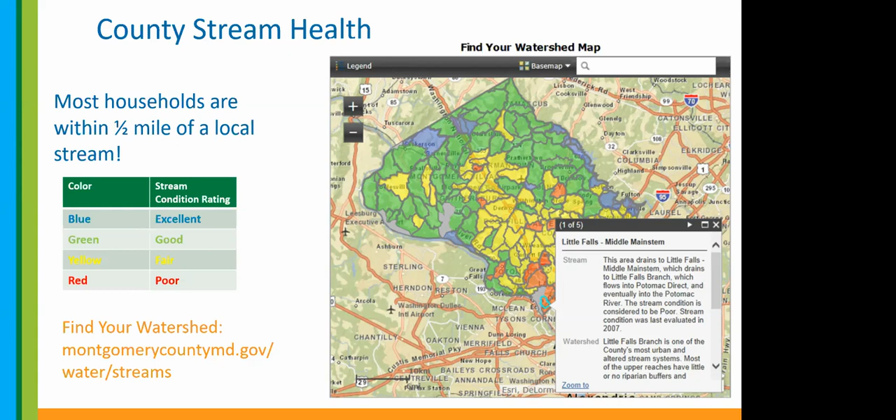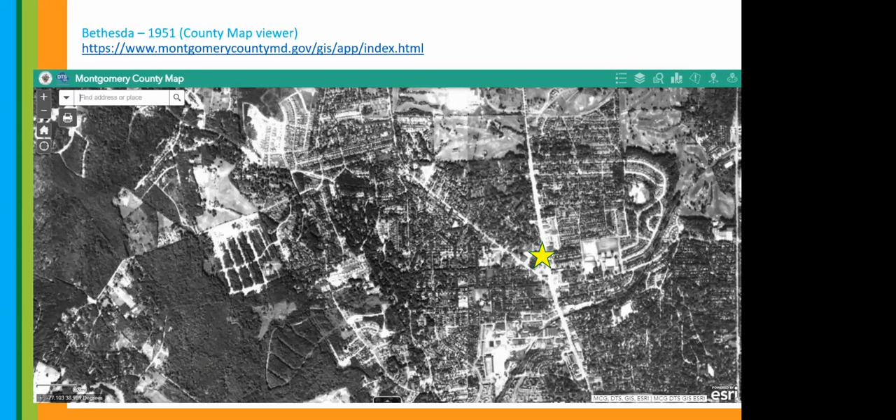So this is 1951, and this is off of the county map viewer. So when you look now again, here's Bethesda today from the county map viewer, and you can see the big difference we've had, especially on the left side when it comes to development and expansion in the Bethesda area. Star's in the same spot, Old Georgetown and 355. So you can see how much we've expanded in 50, 70 years.

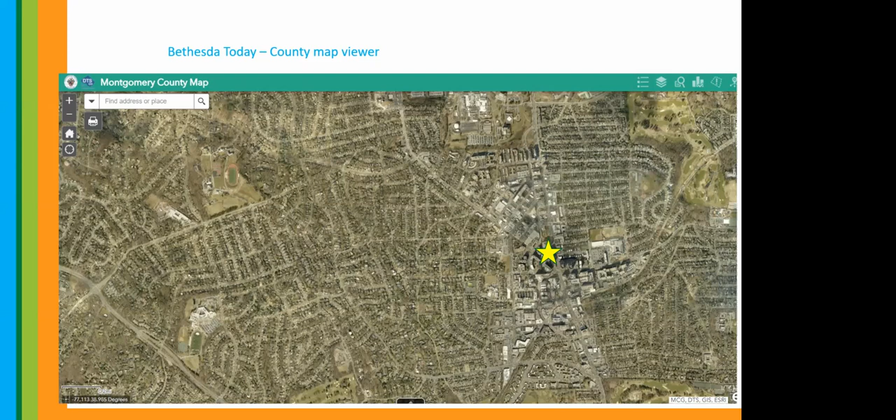What happens is those areas that used to have wetlands or be connected to the floodplains - the water was able to expand out and not create as much of a flooding situation, it was able to absorb it. Now when we pipe it, we don't have the ability to slow it down before it gets to our streams. So, runoff - everyone knows what runoff is.

Water does not soak into the ground. It hits these harder surfaces like rooftops, driveways, and parking lots, and it collects contaminants that flow directly into our streams, into our storm drain pipes, and eventually leads to our streams.

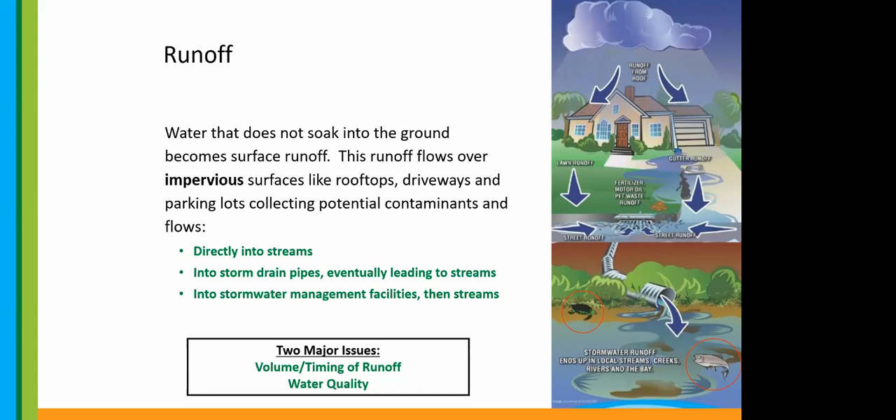To explain this a little further, to compare the difference between a natural environment and the urban environment - this is an example from the Philadelphia Water Department, which I really like. In a natural environment we don't have buildings, there's no hard surfaces, you have natural spongy soil, and it's able to have about 25% infiltration in the first layer of the soil, with deeper penetration into the subsoil areas.

So when it rains, that much is absorbed back into the ground, and you also have evaporation of about 40%, which leaves 10% as just surface runoff that comes off of the land.

But when you build on it, we have all these buildings, and those are all surfaces that are not able to absorb water, and we have very little infiltration into the ground because it's either paved over or there's a building there. Since the soils are so compact, there's very little infiltration into the soil.

So what happens is we have about 55% that ends up running off, which is a huge increase in volume, and that's what we end up seeing with a lot of the flooding that we get today.

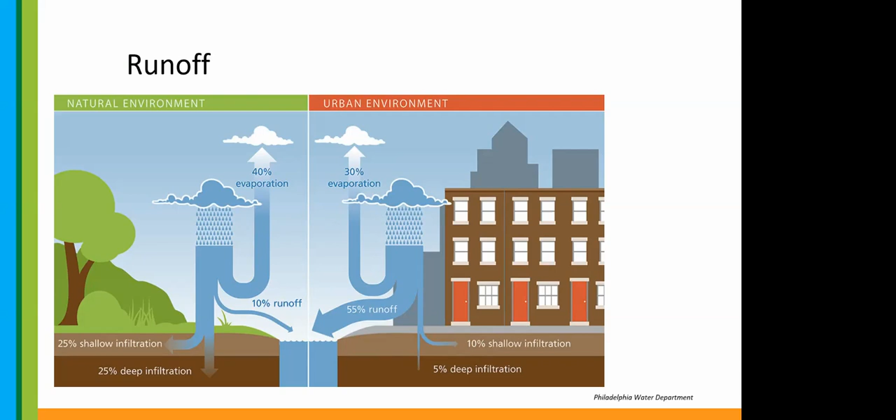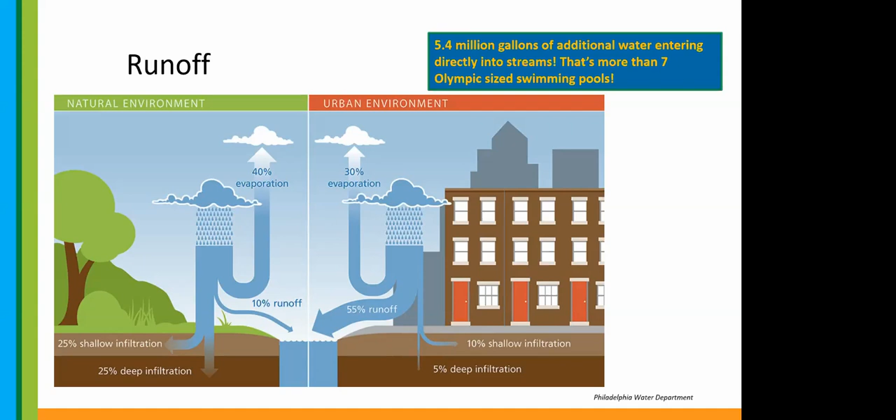I could say, as an equivalent comparison, it's about 5.4 million gallons of additional water entering into our streams - about more than 7 Olympic-sized swimming pools.

Big difference. To illustrate this again, these are two examples, also in the Pennsylvania area I believe. You can see the green - this example is urban Mercer Creek.

So when it rains, right from the very first hour, we have a huge spike in the volume of water. There's higher stream flow increase, higher peak flow. This happens when we have flash floods and a lot of increased erosion, because it's basically a wall of water hitting our streams in those areas, and then it goes down really quickly too.

But if you have a forested area, there's much more ability for the water to absorb into the ground. You can see the blue line here where there's not as much of a spike in the volume of water coming through - and this is measured in cubic feet per second, so that's a lot of water rushing through these creeks at that time.

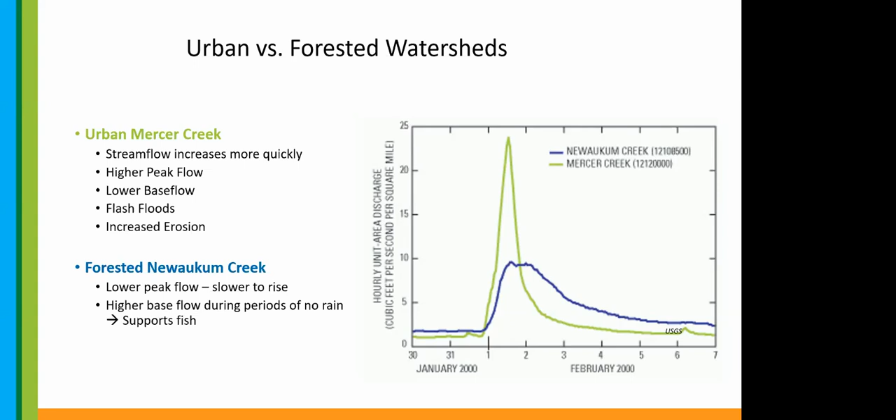So that's just an example of the amount of water coming through some of these areas that are heavily built compared to a forested area.

And then, of course, with it, it takes all of these contaminants, trash, higher temperatures, water that's coming off of surfaces like the parking lots, the temperature is higher. Oil spills, pet waste, all those things can end up washing down and into our streams. Again, trash. So those are all connected to our storm drain system, and all the storm drains connect to our streams. So basically, if it's left on the ground, it goes through our storm drain system and into our creeks. And again, those end up clogging some of our streams too, and our streets.

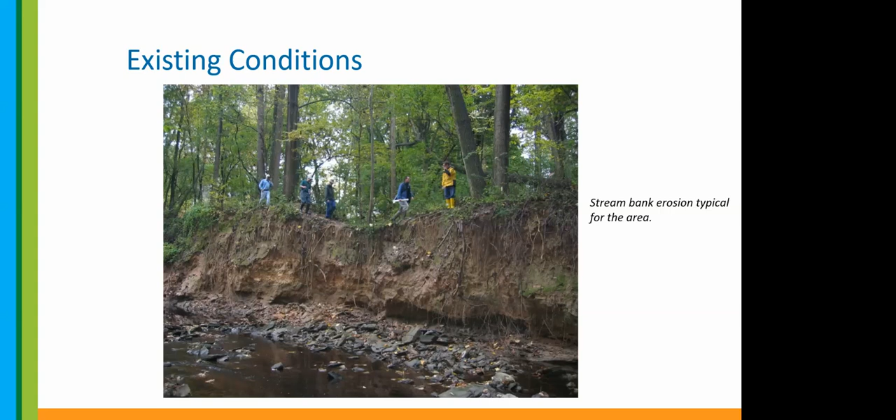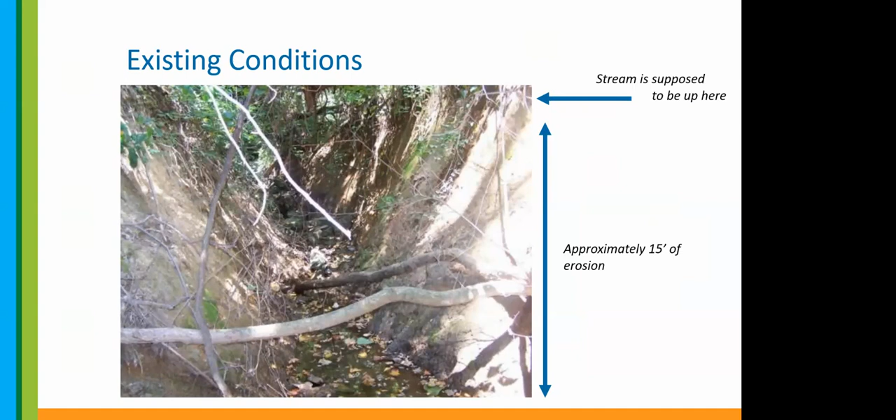Here's another one, same example. Basically, the stream is supposed to be up there. That's 15 feet of erosion over time. So in forested areas, there is a natural ability for erosion, a natural process of erosion. It happens. But we certainly accelerate that by the type of building and development that we do in our areas.

And some of them are actually built up completely, taken in that entire area. And you can see the difference between this home and the one next to it. So the more these houses increase, the more impervious surfaces are, the larger the roof size. This one has a driveway now, things like that.

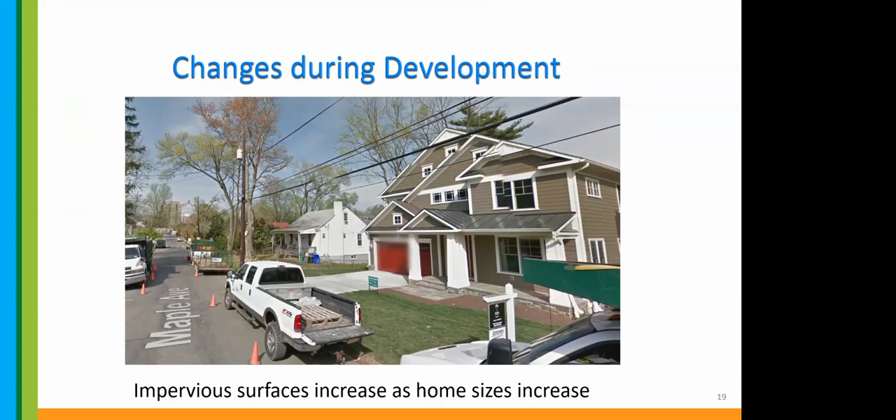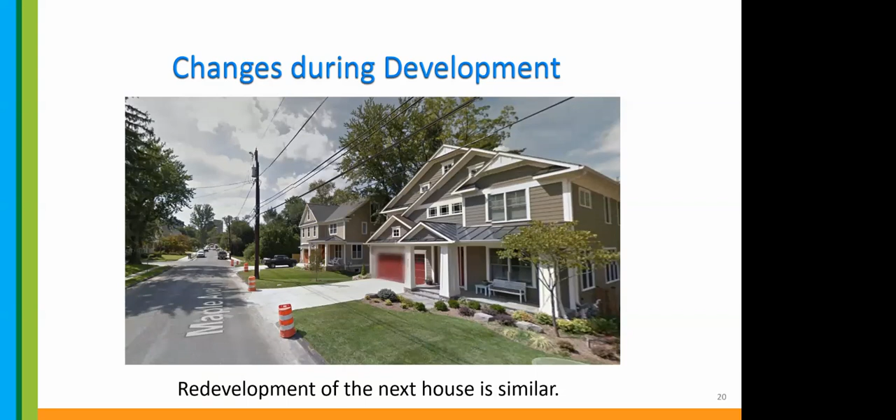Now, some of these have been done before the Stormwater Act of 2007, but I'll show you a couple examples of how this has gone in this area. And then next door neighbor did the same thing. So there's nothing wrong with these homes, but you'll see as I get further along what happens in that situation.

So to show a little bit of a comparison, financially, we had to think about what effect this was having, like on our tree canopy. So trees are very important for the protection of stormwater as well. They absorb rain, first flush rainfall, things like that. So they're important to have, and the roots keep the structure, keep the soil in place when we're doing these, when we have these projects.

So for the first home, it sold for $615,000. And then once the new house was built, it was almost $1 million more. So you can see a big difference in the costs for these. So the area is being built and being, I guess you could say, improved, but it depends on your eye of the beholder, I guess. Beauty's in the eye of the beholder. But so there's just a big difference in what might have been a smaller, more community-feel kind of place, and now some of the larger homes.

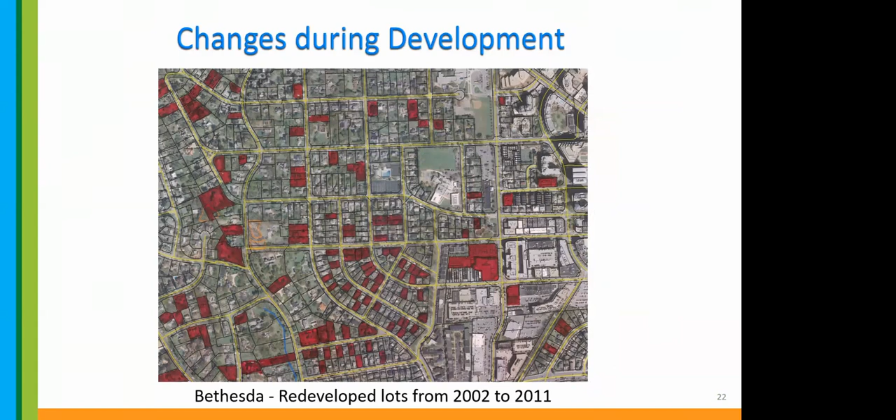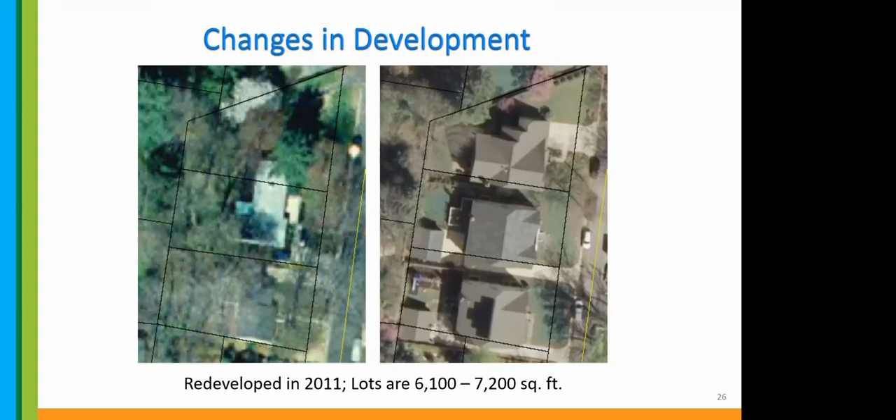Here's another example of areas where the trees were completely taken out. These three on the left show the little rectangles, the shapes. This was 2 homes that took up 3 building lots. So you had two homes there, and with redevelopment we got 3 much larger homes. They basically cleared out all the trees in that area and put in this little postage stamp, leaving no area for anything to absorb water, and no trees.

So what's the big deal about all this stuff? Really, it's damage to property and our infrastructure. I'm sure many folks on this call have seen this.

Just to show a little comparison, we have 1,500 miles of streams in Montgomery County, but 11,000 miles of stormwater pipe, storm drain pipe, and 900 major outfalls, covering about 500 square miles of Montgomery County. To give that some perspective, this 13,000 miles is about the perimeter of the United States. That's a lot of miles, a lot of pipe, a lot of water.

You can see in the picture on the left, the stream used to be up at that level at the bottom of that outfall - there's a little outfall pipe there. We also have pipes on the right side; that's a sewage pipe, a WSSC sewage pipe, and this erosion affects our infrastructure. So it's really important to be thinking about these things as we're doing development.

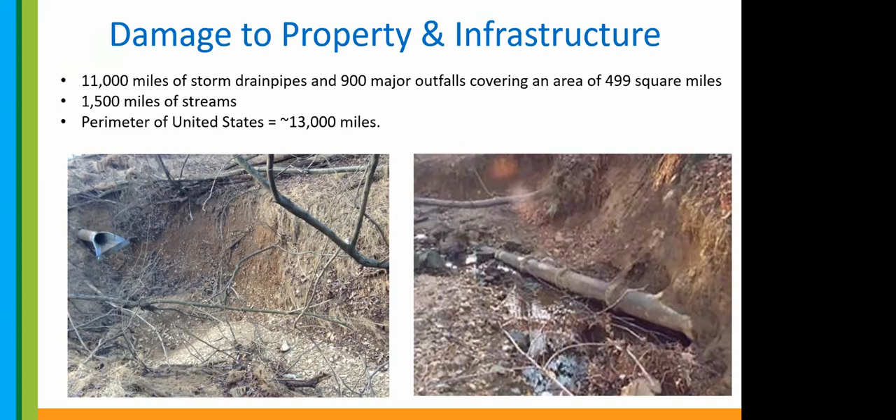To show a difference in stormwater and impervious surfaces: when a stream is in a watershed that's about 8% impervious, that's what we look at for our Special Protection Areas, or SPAs - about 8% impervious cover is really the max we'll look at in those areas. Anything above about 10% is where aquatic life basically declines and it becomes very difficult to get reestablished. It used to be thought of as about 15%, but more and more studies are finding less and less is able to be recovered.

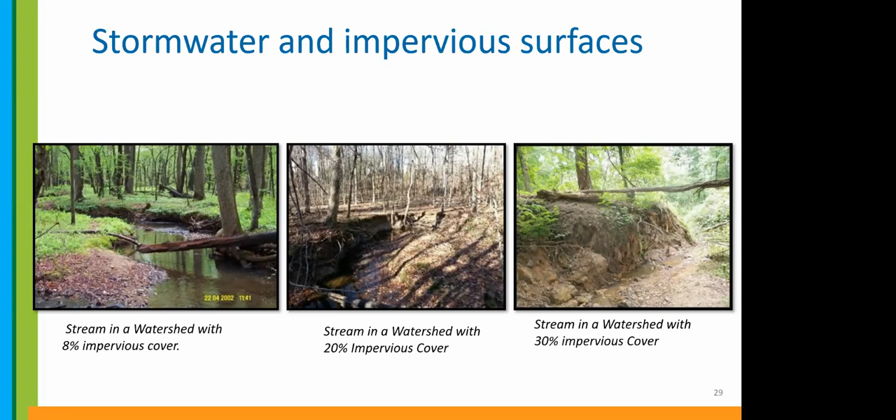If you look at the picture in the middle, that's an example of a stream in a watershed with about 20% impervious cover surrounding it. Finally, at the last, that's kind of what we have in our area - unfortunately, I don't know specifically what it is in the Bethesda area, but some streams have a watershed with 30% impervious cover, which is very high. We've worked in areas that are almost 50% impervious. That's really a detriment to our streams, and as you can see, the result is straight up and down stream banks, clear erosion, and really some bad impacts there.

So what does the county do to help with these things? We have several different programs that we work on, including our capital improvement design projects. That's where we do things like stream restorations and stormwater pond retrofits, where we turn a pond from a dry pond - which isn't really a pond, just a grassed depression area where water flows when it rains - into a wet pond, so it stays wet a certain part of the time and can process the water a little bit better.

We also do our RainScapes program, which I'll get into in a little bit. That's a volunteer program for residents where they can put in rain gardens and things like that on their home and take up stormwater from their own home. And there's rebates for that. We also have our Tree Montgomery program, where you can get a free native tree for your property from the county, and organic lawn care.

We do stormwater maintenance on over 14,000 stormwater facilities now. There's a lot of those all throughout the county, and that's a big job. And then, of course, our grant program, which you talked about. We do a pet waste program where we work with HOAs to set up pet waste stations and collect pet waste, rather than having it flow down to the stream. And of course, litter, trash, recycling.

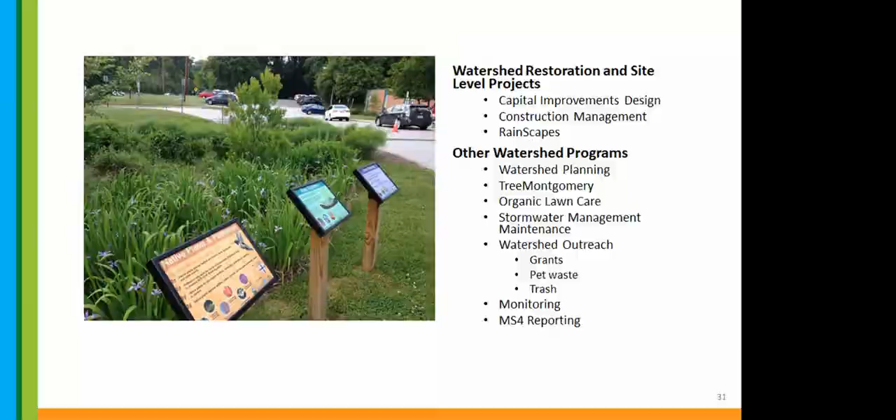So our capital improvement projects - these are the ones where we're talking about stream restorations, pond retrofits, and green streets. Here's an example of the Hollywood Branch. This is an example of a step pool area. We reconnect the stream to the floodplain so that when it does rain, there's an area where the water can go outside of the banks rather than just rushing right down straight through the middle.

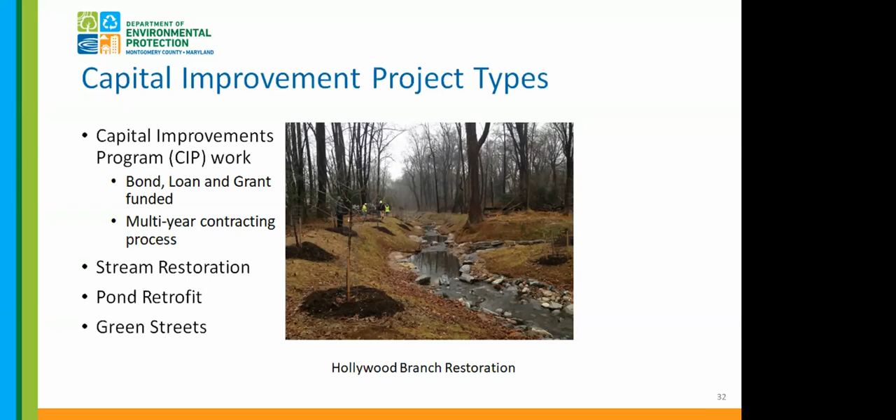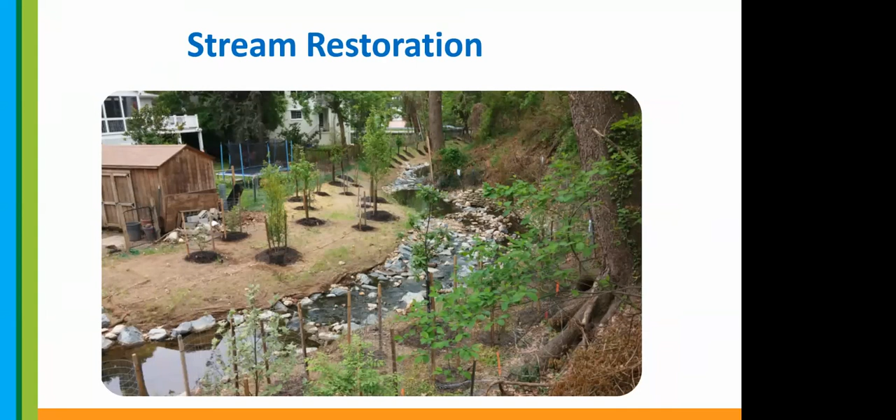Here's another one that's in a very tight area. We may not be able to connect this to the floodplain as well, but we do protect the sides. You can see there's some larger rocks in the back towards the top of this photo, and then we plant trees along the sides to really hold that soil in place for the streams.

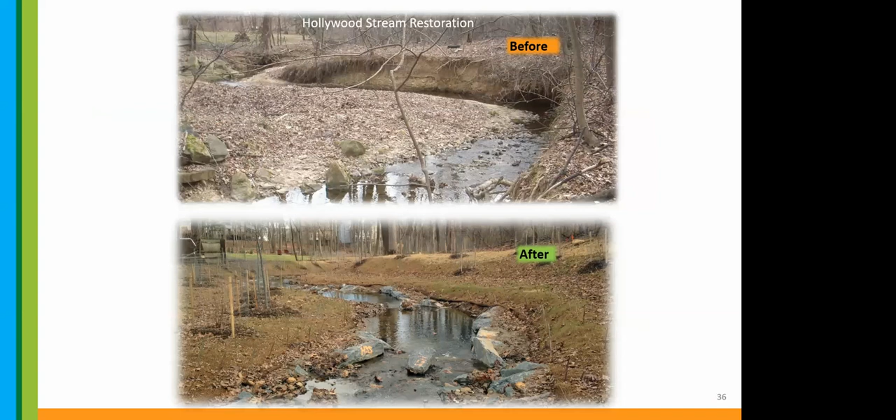Here's another one for Hollywood Branch. You can see the before and after, and how much nicer it looks compared to what it had before, affecting the erosion. Here is one in Woodlawn.

I really love the next one, which shows a complete project. It may not look perfect or beautiful right when we've completed it, but then you have this one where you look six months later and it's starting to fill in a little bit. We have some logs in there, all kinds of different techniques that we use. And then finally, here's the second year at the bottom picture, where you can really see it coming into its own and doing much better.

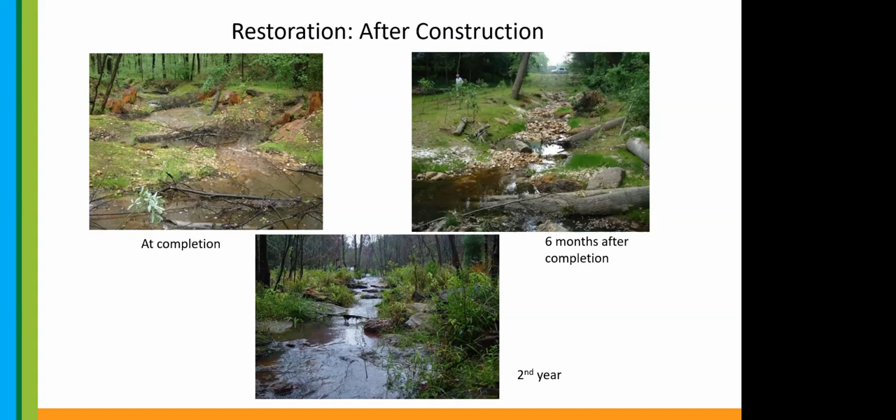Our Green Streets project - that's where we're going into neighborhoods. We've done several of these; I was actually at one earlier today. Glenmont Forest is the current one we're working on, and we have a little over 400 that we've put in the county so far. That can consist of rain gardens, bioswales, tree boxes, and bioretentions, which are very similar to rain gardens, curb extensions, pervious sidewalks, and permeable pavements, where the water just absorbs right into the pavement.

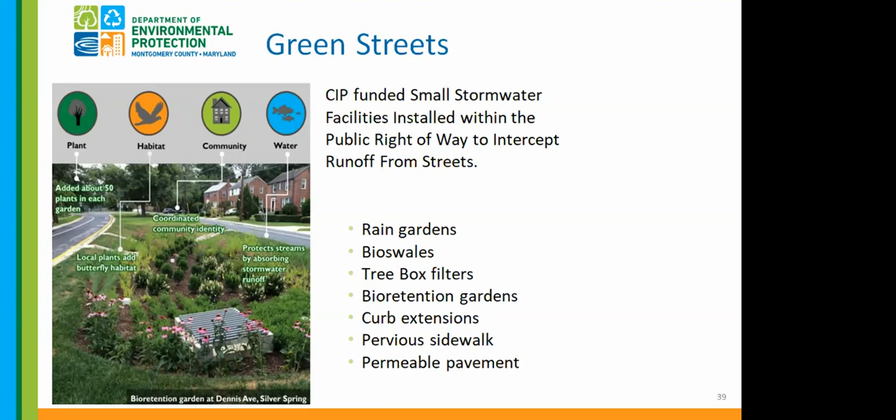I don't recall the exact number, but I think we have about 30 of them so far in different areas. The Wheaton area right around our headquarters and building is the majority of where we have them now, but this is pretty much open to anybody. I know Parks is also doing this type of project as well. So it's a really great way to work with volunteers and get that community connection for folks.

The next one is our grant program. I work with nonprofits, whether it's a faith-based organization or people like Bethesda Green, which I know Kim will talk about a little bit later. We've done 62 projects over the years. We started in 2014, 2015, and we've given away, or funded, about $3 million worth to various nonprofit organizations - anything from tree plantings to changing parking lots from regular asphalt to porous pavement, rain gardens, and just a ton of volunteers have helped with all of these projects. So it's really been a great project for us.

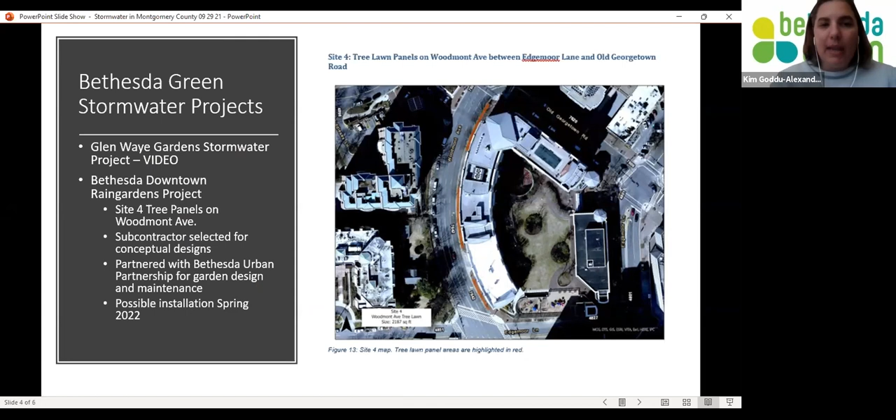And I can send out a link - we have a longer video that folks can look at their leisure on our website.

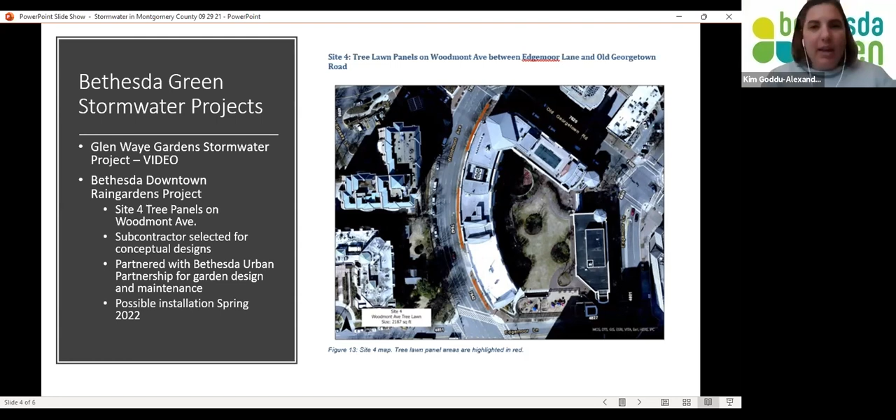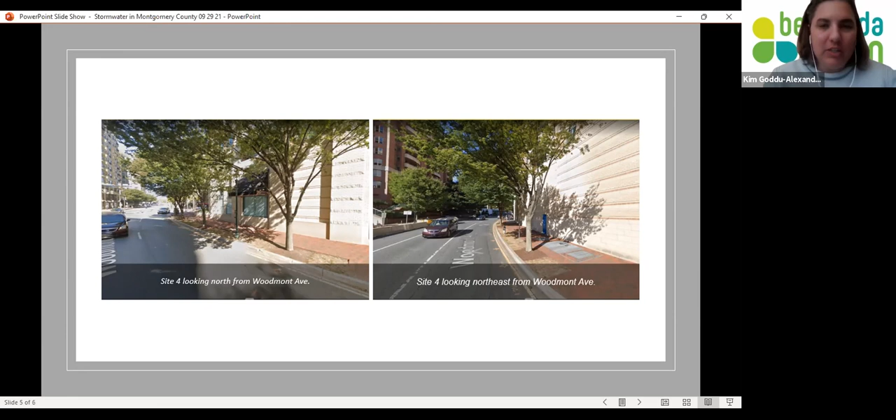Ryan, you mentioned that to mitigate stormwater, there were pervious pavement surfaces that we could use. What type of surfaces would that be?

Depending on what you want to do, really what we look at is the retrofit. So if you have an existing driveway, whether it's asphalt, concrete, whatever, you can replace that with what's called a permeable paver or pavement system. It's pavement bricks, almost like a regular patio, but they have notches at certain areas, and it allows a gap where you put small stones in between. When it rains, the water flows in between there. There's also a capacity area underneath—typically 12 to 18 inches of a 2B stone, which is about 3/4 of an inch to 1.5 inches, just your regular fill stone, and that goes underneath, which is where the capacity is.